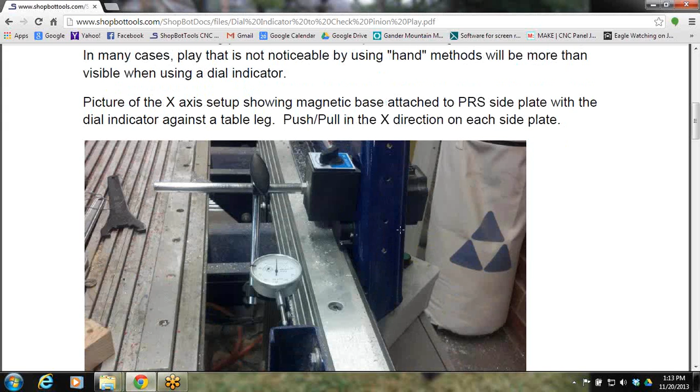Right here's a side plate, this is the end of a gantry machine, and you can grab that with your hand with the machine powered up, not turned on as far as the spindle turning, but the machine's got power to it. Grab right here with your hand and pull back and forth, and you'll eventually get to a point where that's got a lot of play in it. If you can move that thing back and forth a 1/16 of an inch, something's not right, something's not set on there. You don't need a dial indicator to show you that something's wrong.

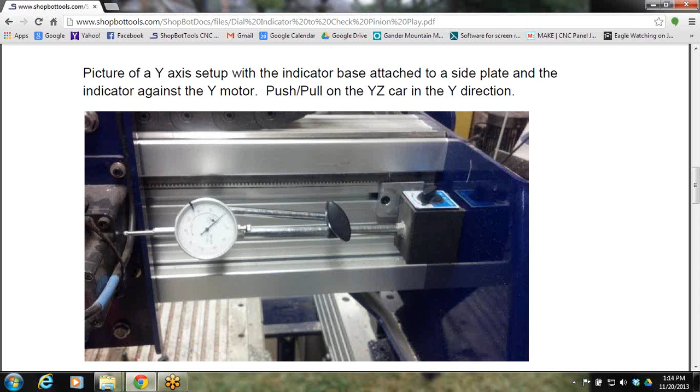But this is a way to, once you get it dialed in, use a dial indicator to move it back and forth and see what you have for tolerance here.

These are just some of the different ways of checking on that. But what I wanted to get into here is actually adjusting and putting in a new pinion gear. This is something when I had to do the first set of pinions, I printed this out, went out in the back, found the wrenches, and started replacing them.

What they're going to ask you here is if you call in, they're going to ask you what machine you have. Lately we have been referencing all the machines. In your folders, you would have the pack slip that we sent out with your machine, and right on it we have how many teeth are on the pinion and the part number, so we would know.

Just to reference too, your X and Y motors have a 30 tooth, where your Z axis has a 25 tooth. On a lot of the newer machines, they don't all have the same size. There's different ratios for different gear reduction motors. So that's one way to find out, if you have a newer machine, where to find what teeth you need.

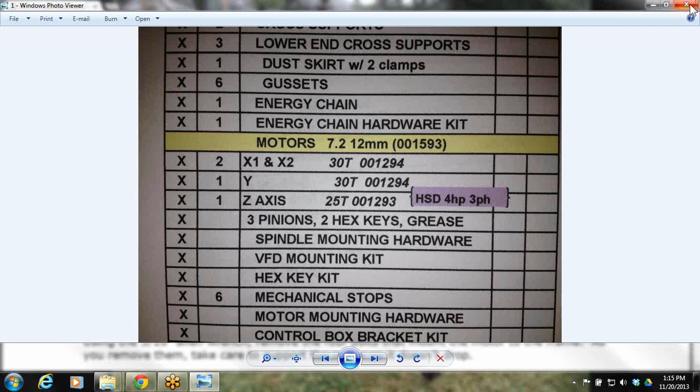But really the easiest thing to do is to actually count the number of teeth on the machine. These are all things to have on hand before you call in and order a new set of pinions. Depending on your machine, a pinion set could be between $40 to $60, and we're going to go over a maintenance doc here in a sec that will show you how long these will last.

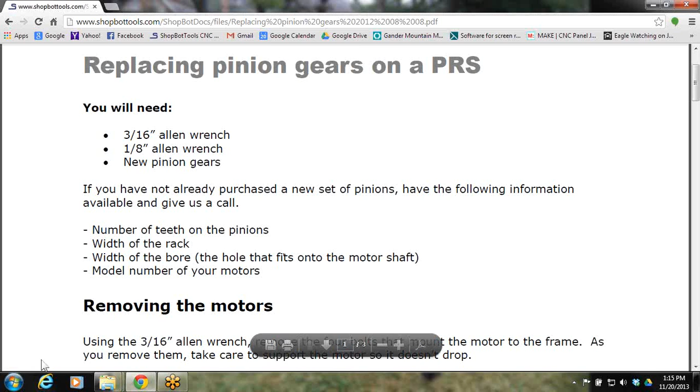What this first video we're going to get into doing is we're actually going to take and remove the motor, change the pinion, and put a new one on.

As far as machine maintenance, this would go to all machines. This file will be on the machine doc as well, but I've modified it a little simpler just to have it on one sheet to have it next to your machine. So we'll post this on there as well. This is really a daily checklist right here.

Warm up your spindle. If you have a spindle, you can do a C5, and that's just a shortcut for warming up your spindle. What you want to do is run your spindle C5, spindle warm-up routine, and that would warm up your spindle and let it run without a load being applied to it.

You're not actually cutting. Your spindle's just up in the air above the table, spinning around, letting the bearings and oil inside the spindle lubricate and get ready before you start cutting with it. Physically check the bit and collet nut for wear and debris. As you get into overconfidence mode, especially on a shared machine, you might think that looks like a 3/8 bit in there, but upon further inspection you'd find out that bit might have had some carbide chipped out of it, or it might have been a metric bit, and when you make your cut and have a problem, it might be something as simple as just that.

You're always going to want to home your machine. You never know who used it last, especially on a shared machine, either in a school or a shop.

Zero the Z-axis, and you have to make sure you zero it to however you zeroed it in your drawing file. If you zeroed it to the machine bed in your drawing, you better make sure you do it to the machine surface when you get out to your tool. And then finally, just do a proper operation check of router, spindle, vacuum, and dust collector. Make sure everything's running before you go.

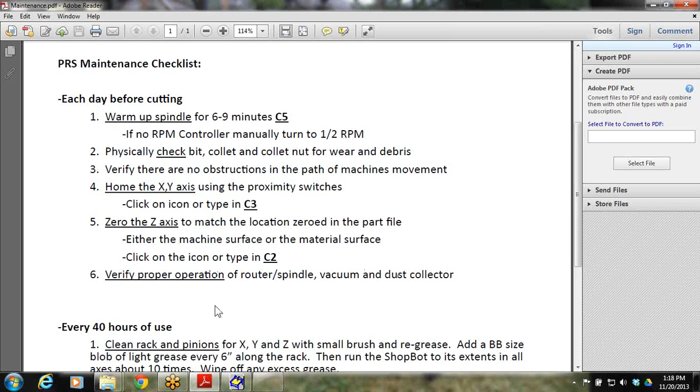It's good inspection. This is where we're going to get into the maintenance videos of today. One thing I see I don't have on here that should be is, first things first, you want to make sure that fan above your spindle is working. If you don't hear the fan going, it's not blowing air on that spindle, and that spindle could get too warm. So always make sure that fan's on.

Clean rack and pinions with a small brush and re-grease. We'll be going over this. Clean the Utilitrack, that's what's on your YZ car, that's what your spindle's hooked to, or your router's hooked to, and it goes up and down. Scrub all hardened V-rails, and just check your rack and pinions.

And right here is the bottom one, really the one you see in the slide. Collets and pinions are good for 400 to 500 hours maximum if they're kept clean and have not been crashed. We'll show you in a little bit what happens to some collets that have been crashed, and how if you crash it hard enough, you're not going to get your 400 to 500 hours out of these. So there's just your general maintenance doc.

And there's a lot of different size pinions here. We stock probably 10 or 12 different sizes of pinions, because there's been so many different ShopBots over the years. So make sure you identify those before you call in.

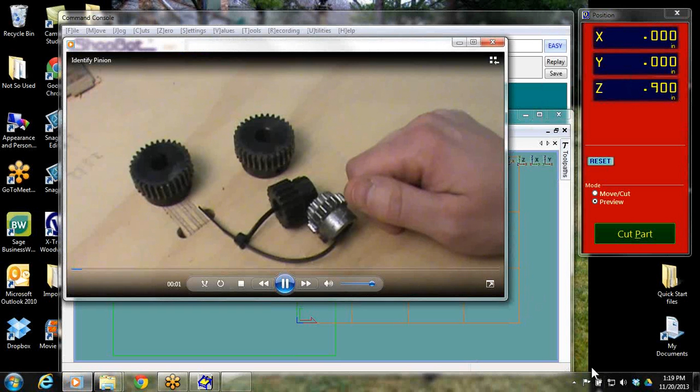All right, so, and again, the desktop people will be through the pinions here in just a few more minutes, and we'll get into general maintenance. So here we can see a brand new pinion, a really worn out pinion, and some pinions here that have needed to be replaced.

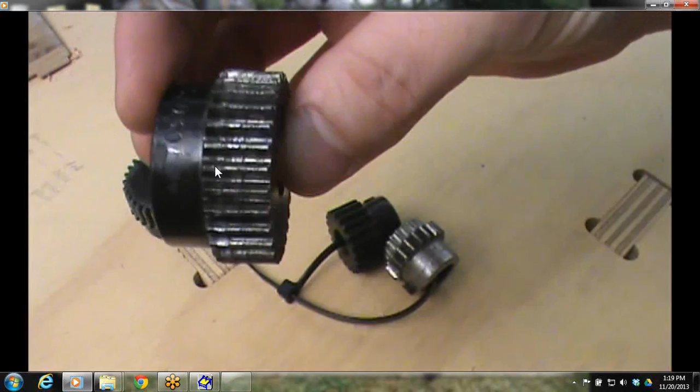So this was something I went and did a production support, where we go and do maintenance on people's machines for them. And this was one that I found these set of pinions on their tool. If you can notice by the video here, it's pretty much worn down most of the way except for this back 1/16 of an inch. So that was showing me that this pinion was not properly lined up with the rack.

And this is something that you do when you put your machine together, is you line that up. So there's a good pinion. And then there's a pinion that I don't know how that ShopBot was still cutting anything accurately. That thing is just gone.

So I'm hoping that you will have found an issue back here on these bigger ones that are on the table still before you get to that level. So you'll have a pinion on each of your motors. Generally your X and your Y's are the same size and your Z is different. So inspect how many teeth that you have.

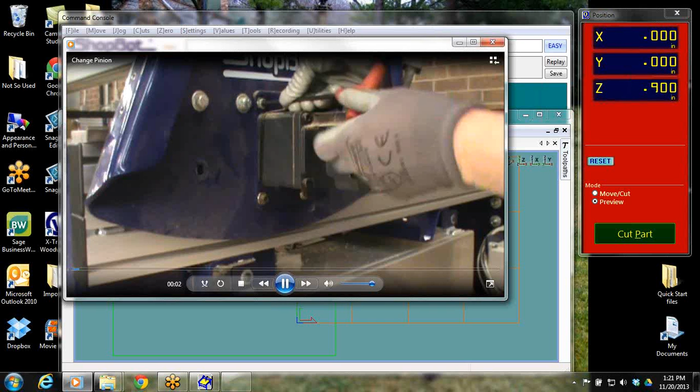So again, this is just one thing with a rack and pinion type tool that can go bad. So this would be your buddies and your gantry styled machines. All right, so how do we change these pinions? There's no crazy magical way of doing this. It's pretty simple. A couple hex key wrenches, loosen some bolts, and we've got ourselves a new set of pinions.

So on a gantry style, you've got pinions on both sides of your gantry. On a buddy, you've only got one underneath for your X. So you got 4 motors on a full-size machine, and you got 3 motors on a buddy.

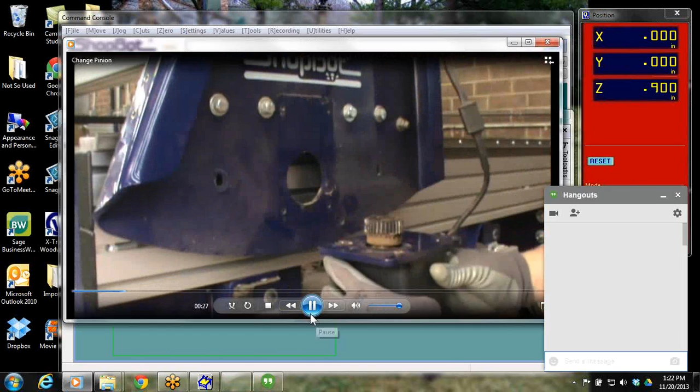So notice how this thing's got this motor plate, and we're not removing the actual blue plate here. We're not actually moving the blue plate. What we're doing is just removing the motor plate from the machine. So don't take the bolts out of the motor, take them off the blue motor plate.

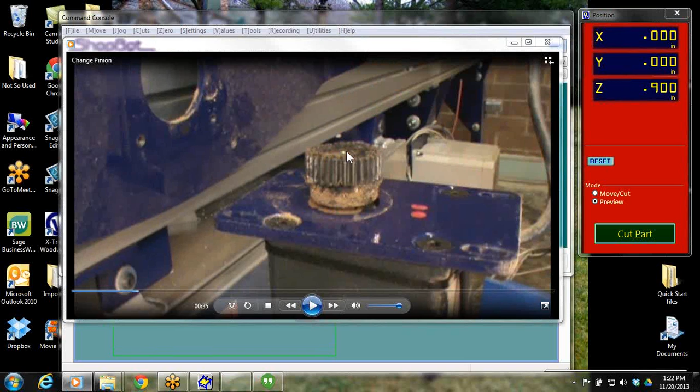So this is a pinion that has been used on our production machine that's full of sawdust and just beat up. What I was doing with my finger there was saying, hey, pay attention to how the relationship to the top of the pinion and the top of the motor shaft is, because when we go and put a new pinion on, we got to try to realign it the same height. You got a lot of play on the shaft of this motor, so you want to try to eyeball where that is and eyeball it back on for our initial startup.

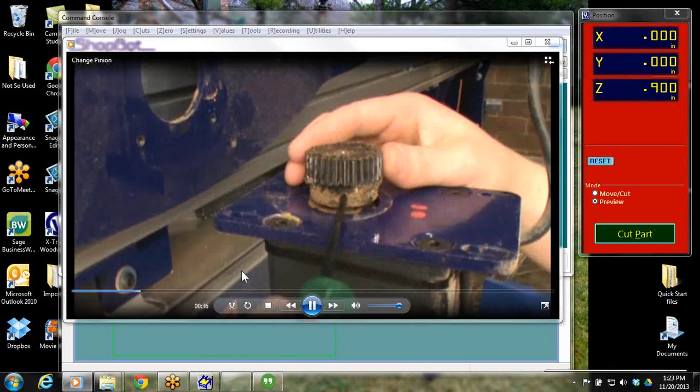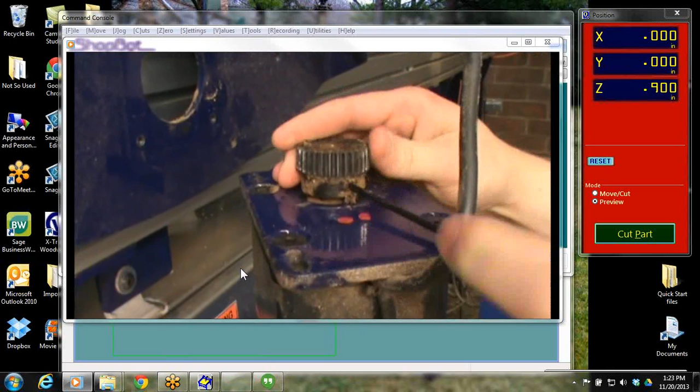So these will have 2 set screws in them. To loosen those up, you might want to blow this thing off or wipe it down first before you try to stick the hex wrench in there. But you just have to keep backing them off, and eventually it'll come loose. That pinion will come loose off the motor shaft.

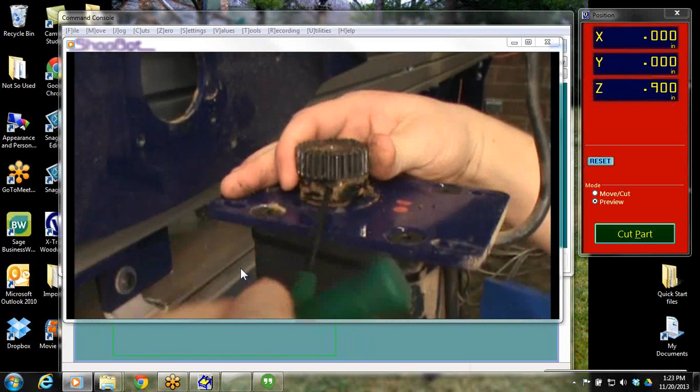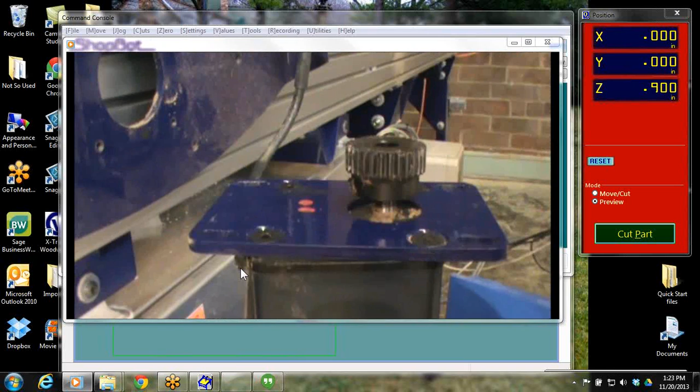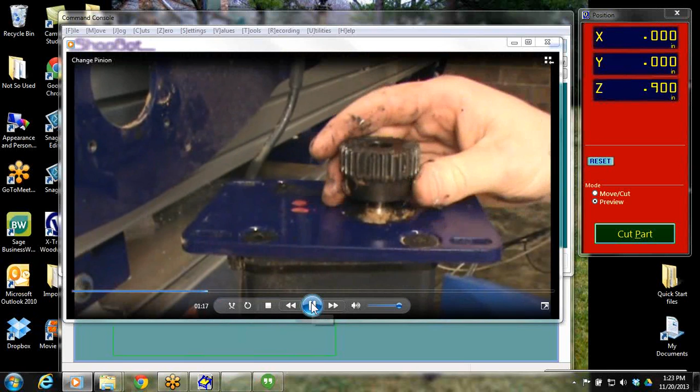Unfortunately, sometimes it gets stuck on there. So right there is me trying to pull it off, and it's just stuck on with that keyway in there. So what you can do here is, I say this very lightly, take a flathead screwdriver and try to pop a little on each side. Don't force it, because what you'll do when you force it is you could end up bending that shaft.

What I do recommend is you go and get one of these right here. It's a gear puller. You can get these at any auto parts store, and you center this, center the puller into the center of the motor shaft, and these 2 hooks, they'll come down underneath the pinion, and as you twist the knob up here, it'll pull that off perfectly straight up.

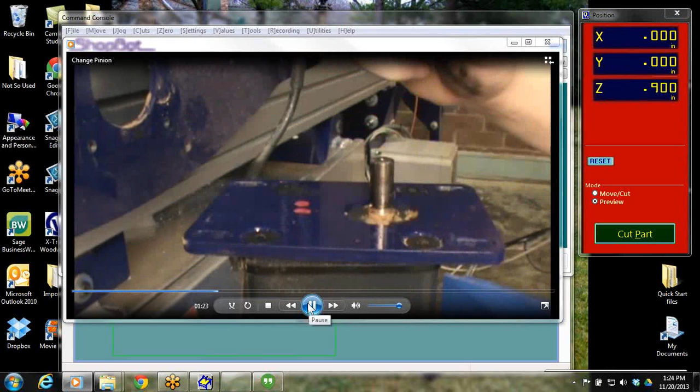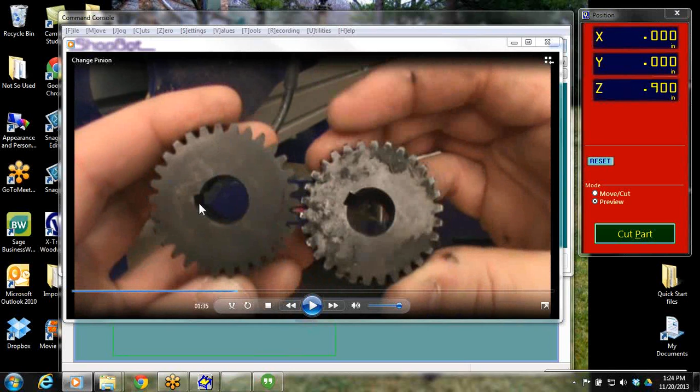So obviously I didn't need it in that part because I already had it loose. But here we go, visually inspecting this, seeing that the teeth have been worn down, and I'm comparing it to the new one. I'm verifying that it's same number of teeth, same diameter, same size collar, shaft size.

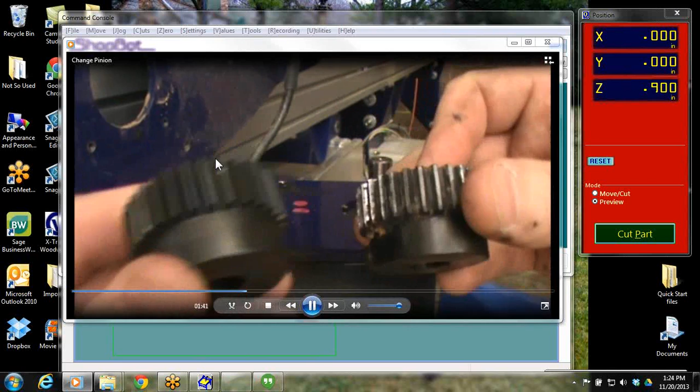Once you're happy with that, go ahead and put this back on. Line up the keyway with the flat shaft of the motor. It's not going to go down easily since it's already been a used keyway, but I'm lining it up close to how I had it before.

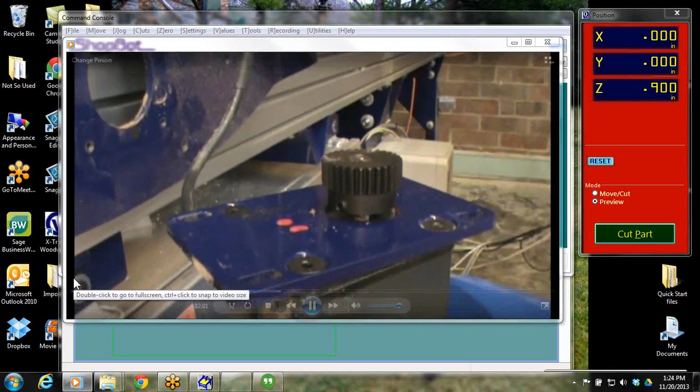I'm just eyeballing it, and I've got my set screw over that keyway. So here's looking at the end of the table, I've removed the stop block so we can see. This is the gantry up above, and here's the table going back to 96. What I'm going to do is visually stick this motor in there and see where it lines up with the rack.

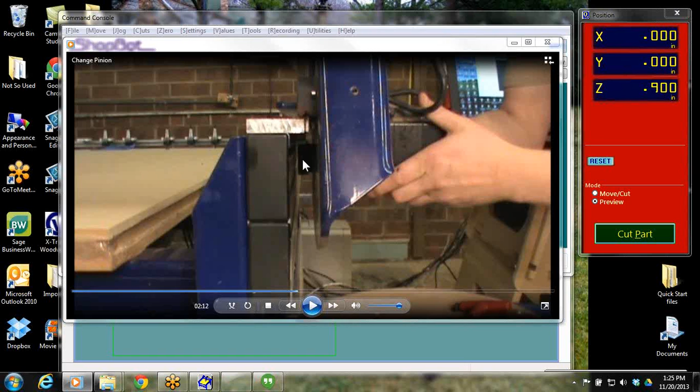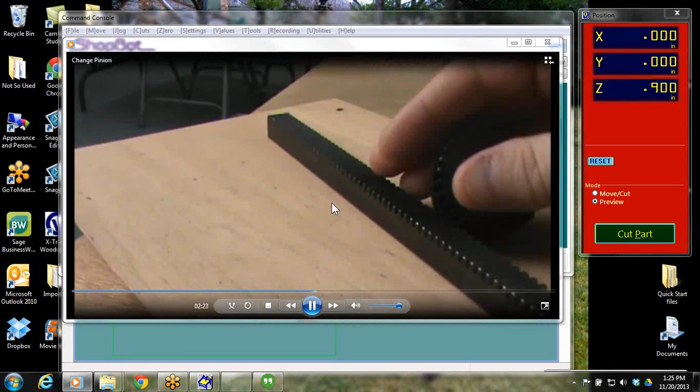So right here, this black part is the rack, and this is the pinion we just slid in. Those two need to be lined up with each other to run smoothly. I'm looking in there asking, is it lined up? To show you more specifically what we're looking for, I've mocked this up with a rack and a pinion. A pinion is a lot softer material than the rack.

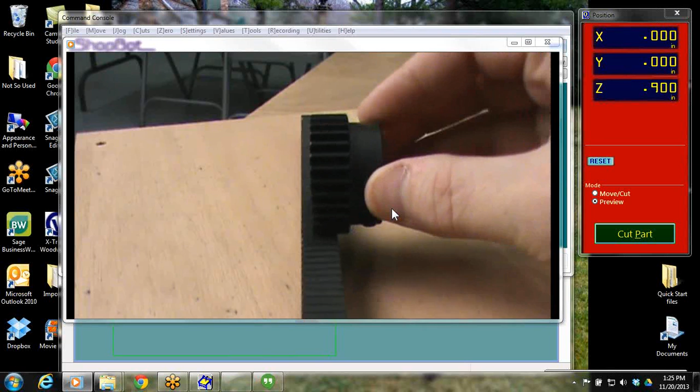If you're only cutting in one spot of the tool most of the time, you'll wear down that rack, and then you'll end up having to replace a 10-foot long rack, which is a lot of money and a pain to do. Where we wear down these softer pinions, it's a lot easier to change a pinion.

So what we're looking for is something like this, where that's flush. I've got the 1/2-inch rack and a 1/2-inch pinion, and they line up directly on top of each other.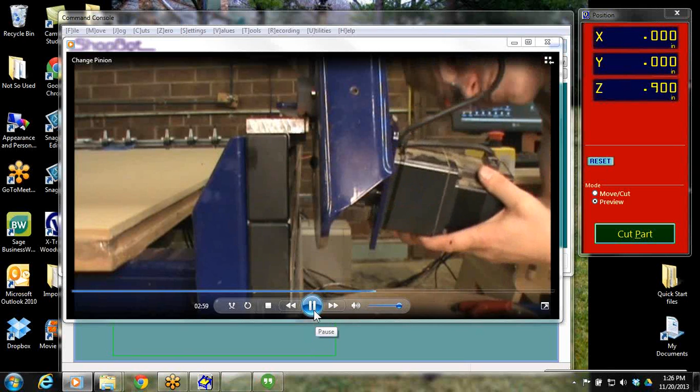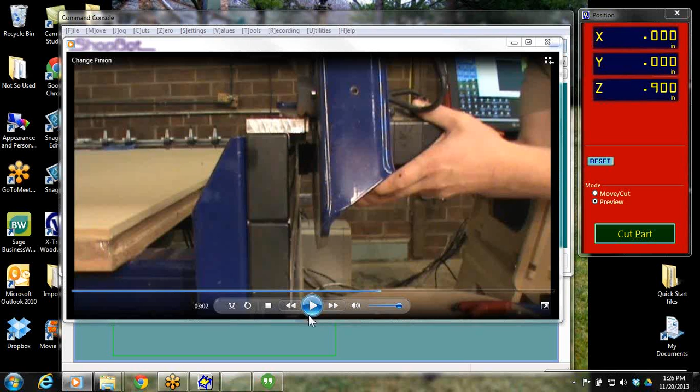So I would go back to the machine here, stick that back in there, and visually look from the end or from underneath, and what I can see is I've got a little bit of a gap here. What's going to happen is it's going to wear down the pinion, and it's not going to wear it down evenly—it's going to wear it down like that one we showed in the previous video.

So what I would then do is loosen the set screws up a little and pull the pinion up on the shaft a bit, which I've already done.

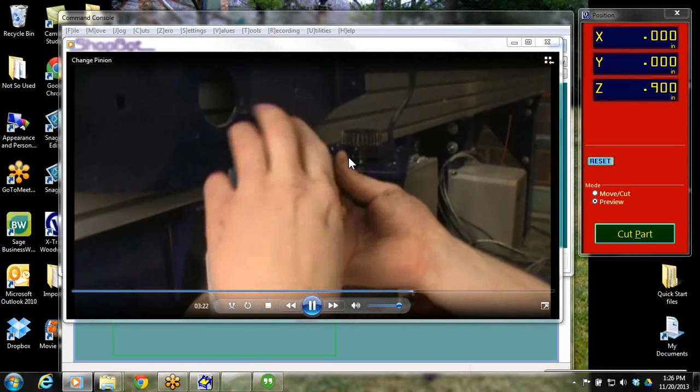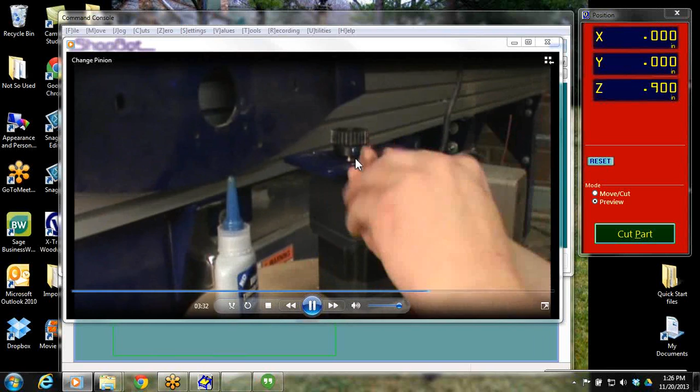But what you see me doing now is taking Loctite and putting it on the set screws, because if we don't put Loctite on there, those set screws could loosen up and then the pinion could have some play in it. Sometimes you might just want to check these because your machine's got a little bit of play in it—it could be that your set screws have loosened up over time, or the Loctite has failed.

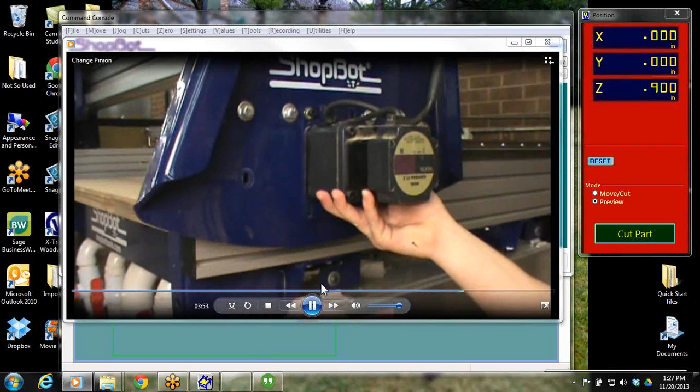At that point, you've got this on. Wipe it down. We've lined it up as far as length on the shaft, and now I've just held it up—I haven't moved the gantry or anything, so it goes right back up into the rack. I'm just hand tightening these bolts right now so the motor can rest in the slotted holes.

A T-handle screwdriver works real nice for this because you can get in there and get some torque on it with your hand, and it goes a little quicker.

So I'm just going to take that and push it up with my hand and hold it, and I'm just going to kind of kiss the bolts to the motor plate—I'm not tightening them, just getting it snug. Then I'm really going to get underneath it here and put some force on it and tighten those down, get those good and tight.

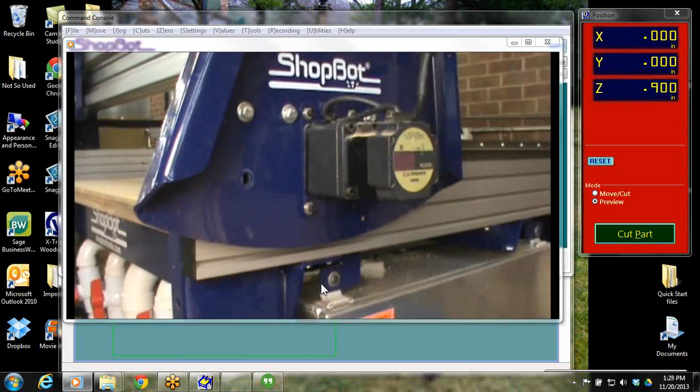And that's how you change it, line it up, and put it back on. Your final check here is to grab that gantry end plate and see—I don't see any play on there, so that means I've gotten that tightened back up.

What you will feel is a little bit of a tick, because there is a little bit of backlash in these type of motors. But if you're moving back and forth 1/16 of an inch or greater, you better go back in there and tighten something—something's loose. But if you're just feeling a little click click back and forth, that's just a little bit of play that is in the motor. That part is normal.

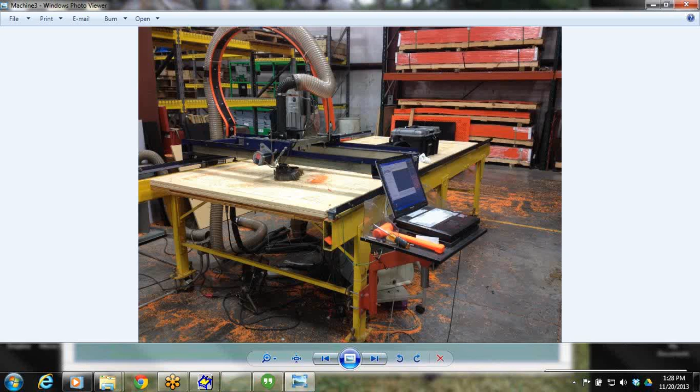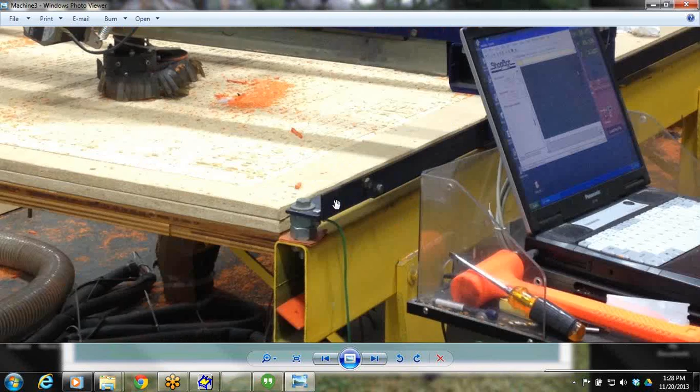Another one to show you here is a PRT motor. This one is done a little bit differently. Here's an old ShopBot - back in the day they didn't even have tables that were sent out. You pretty much just bought the rails up. The rails back then were a piece of angle iron that had a grinder that would grind a point to these, and that's what the machine ran on. So this is one that was a production support where these guys are a production shop.

They actually have 3 ShopBots, and while the other 2 are running, we turned this one off and went ahead and recalibrated it. But for these, the motors are a little bit different.

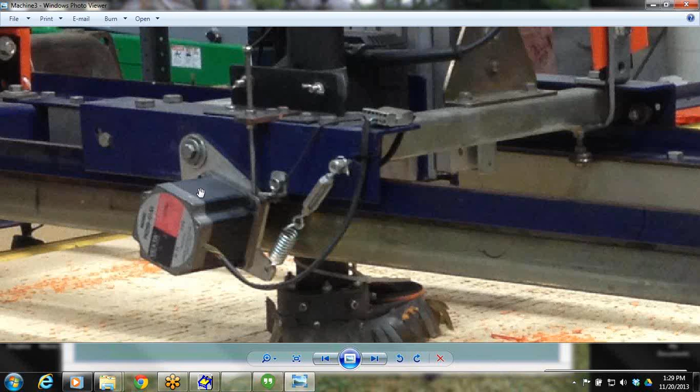On these you actually have a spring that is torsioned down here. So you would just untwist this. It's going to let a little bit of play off the spring, and then what we'll do with that is just take this hook, and it comes off the bolt - this is just on a pivot right here. This thing will just pivot back and forth. So then you'd put a wrench on this and put a wrench on the nut that's on the back side, and that's how you would take it off.

So all these machines are going to have multiple motors. On a PRS or PRT gantry machine, you've got an X motor on each side, you've got a Y motor that runs the gantry back and forth, and you have a Z motor that goes up and down. If you have a buddy, you've only got 3 motors - you have 1 in the X versus 2 on a gantry, where you've got to have power on each side.

So whether it's a gantry tool, whether it's a PRS or a PRT machine, it's pretty much the same concepts for aligning those racks. You want to align them - you don't want to get it in too far where it's scuffing, and you don't want to have it out too far where it's not running parallel.

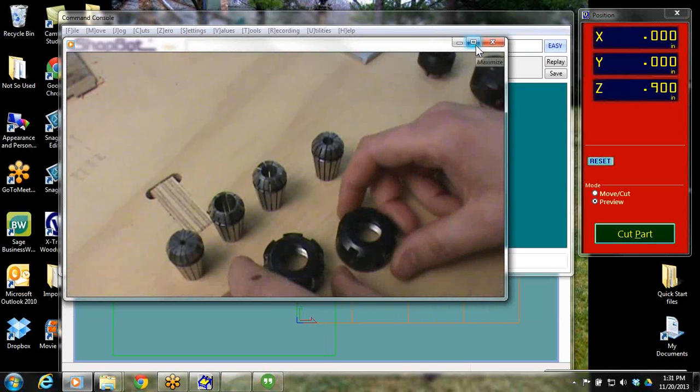So that's pinions. Now let's get into stuff that pertains to all ShopBots, even desktops - collets and collet nuts. There are several different sizes between a desktop, a full-size machine, and even an automatic tool changer. You have different sizes of these collets. Not only do you have different sizes, you have them so they take different bits - here's an 1/8 inch, a 1/2 inch, a 3/8, and a 1/4 inch. There's different size ones for routers as well.

These are a 2-piece spring collet, and they need to be unsprung and all the air blown out of them, all the sawdust blown out, and then have them clipped back together. Your collet nut here that I'm holding and looking inside, I'm feeling for if there's any ridges left. You're visually inspecting to see if there's any cracks or anything in it. If you start having stuff like that, it's a bad collet nut. Collet nuts don't often go bad.

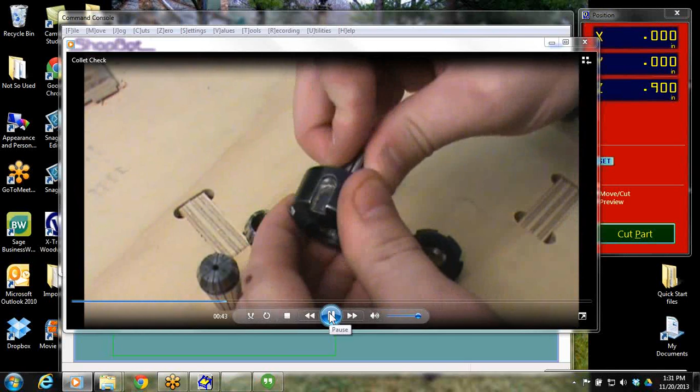They're good for a couple thousand hours, but your spring collet will - you're going to lose some spring in there. So some people will start having problems where their bits start cutting and then it slips out a little ways and starts cutting deeper because the spring is gone. Here's one here - look at how burnt and used up this is in the middle. We can actually visually see that has been way too hot, and look how easy that falls out of there. That should fit in there, and you should not be able to shake that out. If that thing's falling out, your spring in that collet is no longer any good. So that's one to throw away.

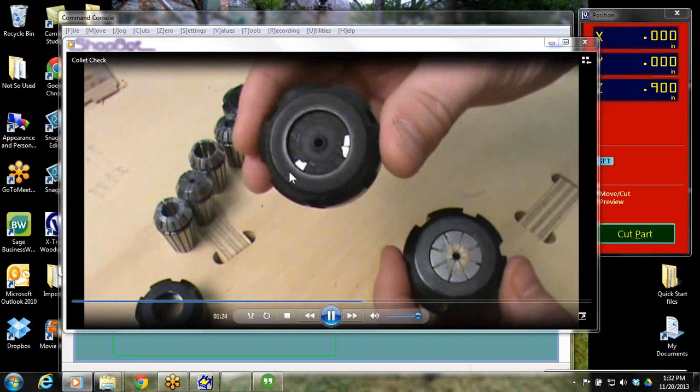Collets are around $30 to $70, depending on how big a machine. These are ones that were run down into the machine too deep - I can't even spring those apart. So what happened was that was zeroed in wrong, and it actually dug down into the material, started spinning, and it sucked the material up into the spring, and now it has wrecked that. So there's a collet and collet nut that need to be thrown out.

If you're breaking those apart with a hammer to try to save your collet nut, you need to just throw that collet nut out. Now look at this one - you got a nice shiny one, and then you got this oxidized one.

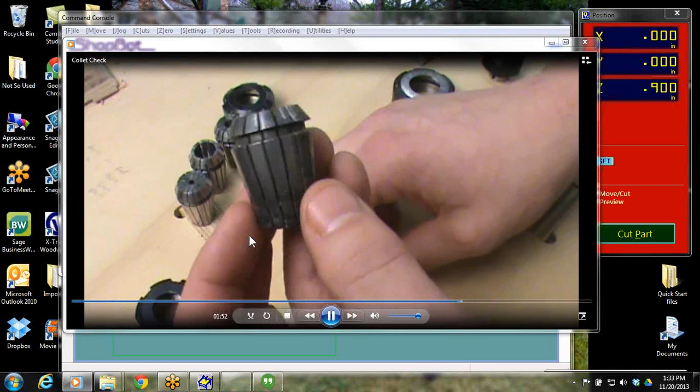This one here sits on the training table, and one of the people in one of the basic training classes accidentally knocked over their Coca-Cola that they were drinking, and it spilled onto this collet. We shook it off but didn't really clean it, and it was like that by the end of the day. It already started oxidizing, and it's gotten a little worse now over time. But something like that too, it's down inside those precision slots.

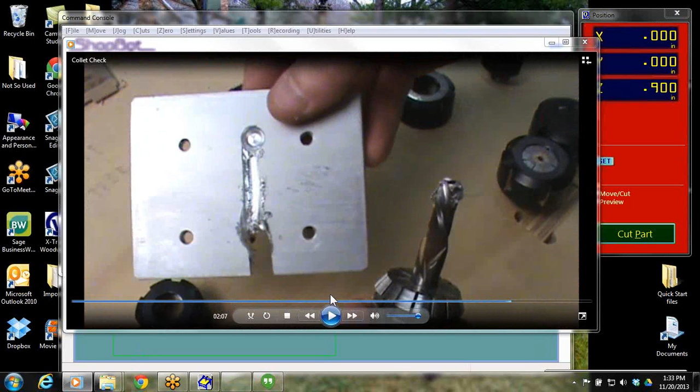That's no good either. I'd throw that one right in the garbage. And finally, what is this happening here? Looks like we had a bad crash. So there are times where we have these little oopsies, and this here was dug into this aluminum. This was on an alpha machine. It started cutting through, then lost the Z position, finally stalled out here and stopped. So it wrecked the bit. And if you have a hard crash like this, and I'm talking, this thing hit hard and stalled the machine out, more than likely you've wrecked your collet as well.

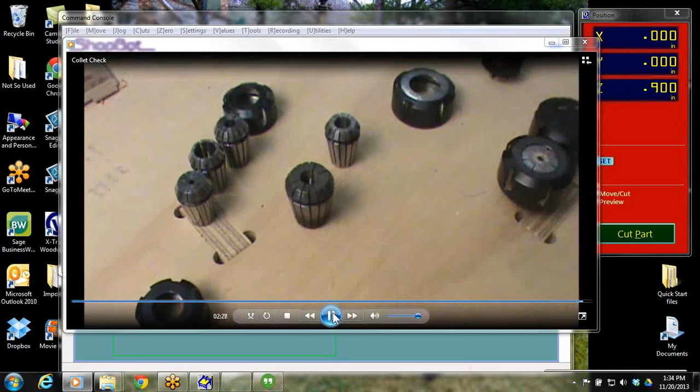Visually inspect the collet nut. That doesn't necessarily always break, but I can't see any physical things wrong with this. But just going and sliding that shaft back in there, it's so loose. It's really just very, very loose. I know that I've kind of dinked up those springs in there from crashing that into the aluminum. So if you have a bad crash like that, throw it away.

So keep them things clean. Keep them blown out. And before you put them into your spindle, make sure you spring the collet and the collet nut together, and then stick it up into the spindle and start threading it. Those aren't designed to be put in there as individual pieces. All right, so there's your collet and collet nut.

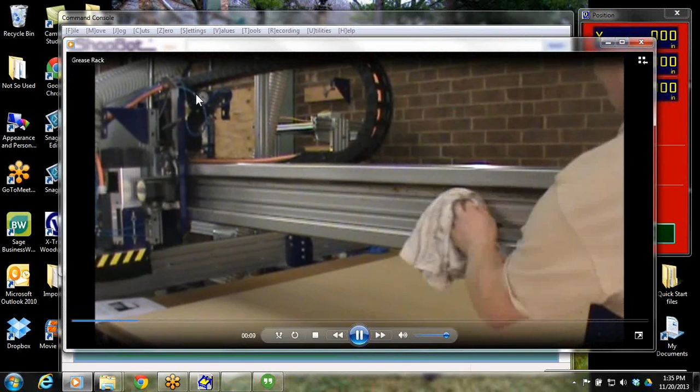Next is greasing the rack. Now let's get creative here and let the machine do some of the work for us. So this is what most of our machines probably look like right now, which, you know, it happens. You're in a shop, you're cutting, you don't have time for this kind of stuff, but any of this maintenance stuff that you can do will help prolong the life of your machine. So I'm going to wipe this thing down with a rag and just wipe off all the excess. Sometimes we even get a little brush out and brush out what's inside the gears.

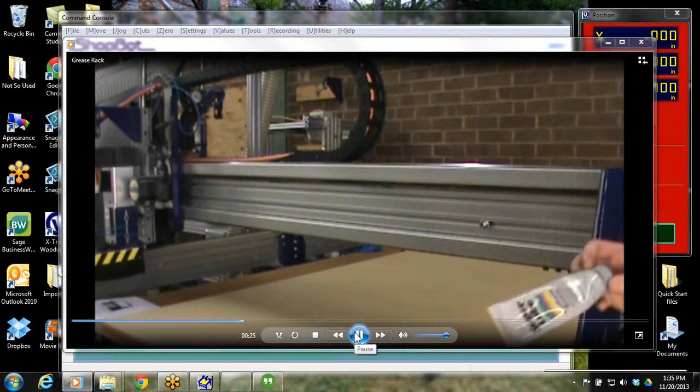But a rack and a pinion is designed to have grease in there. Those little racks and pinions, they're designed to actually have grease inside there at all times. You want to be really lubed up on this. So this is what we use here. It's called Super Lube, a synthetic grease. And this stuff's really nice because it's clear. That way you don't have a black line across your belly every time you lean across your machine.

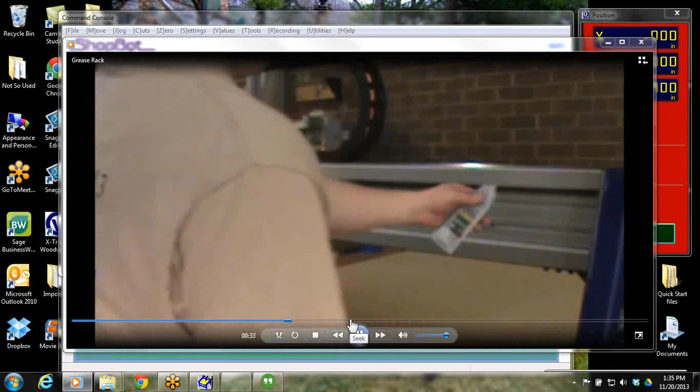So take this stuff and squeeze it on about 6 inches down your rack. And I'm squeezing a lot on - I'd rather have more on there than less. I'd rather wipe off a little excess. I want this thing greased up and running smooth.

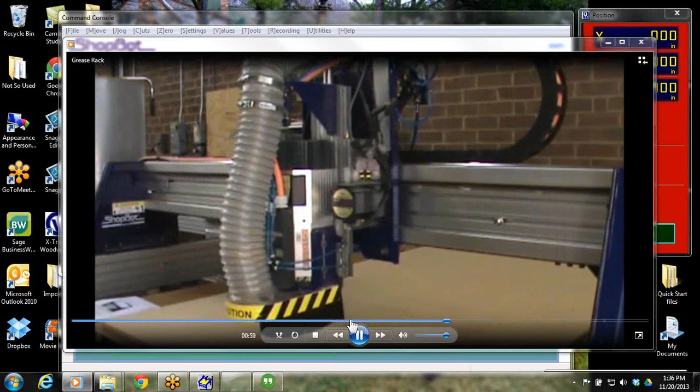So once you've got it on there, just bring up your keypad and use your arrow keys and just move it back and forth and let it grease itself. There's no sense of you sitting there running it all the way back and forth. Do this 8 or 10 times and it will just roll the grease on. You can see where there's some extra already kind of blobbing out, but I'll just wipe that off. So keep this thing up greased good.

I try to do mine once a month or like every 40 hours of use. That's what I do at home. Here at the shop, we're doing this probably about once a week. So just wipe off any extra. It helps keep sawdust and gunk from sticking to it.

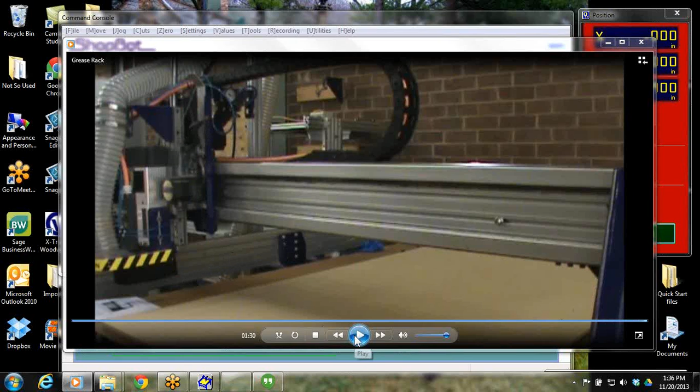And then again, do this on your X motors and your Y and your Z. So you're going to do this on the rack on both sides of your gantry, and then there's a short rack right inside here, and you'll actually put some grease. You might need to get a scrap dowel or something, or a scrap piece of wood that you can put some grease on the end of it and stick it down in there. So keep things greased up.

Another thing that's on the machines is there's a little grease fitting on the ends of the gantries for the desktops, and that's where you can squeeze a little grease into those. If you look on your actual machine down in the bottom of the gantry, there's some little fittings there where you could put a grease gun on it and squeeze some grease into there.

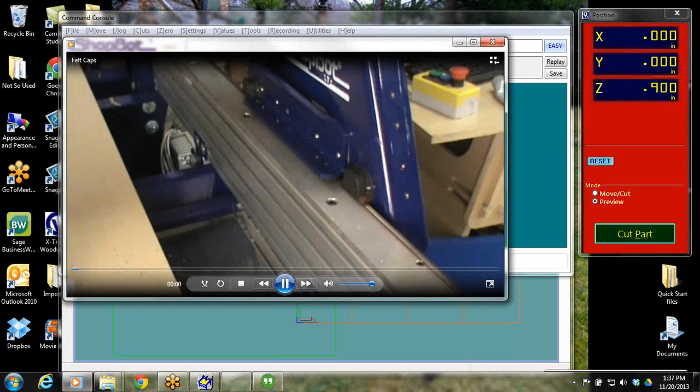Alright, so the next thing is felt caps. These are something that get overlooked by most people. This is on the inside of our gantry, right inside of the beam, and here's the work table back here. I'm taking these 2 little screws out because you've got 4 of these running along the gantry, and then another 4 of them going along the beam.

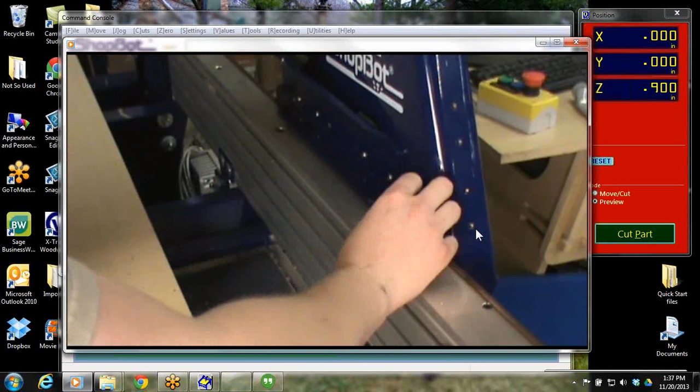So these are wiper caps number 2 and wiper caps number 3. More than likely the caps won't go bad, but what they'll do is I'll pull these off sometimes out in the field, and that whole thing will be completely full of sawdust.

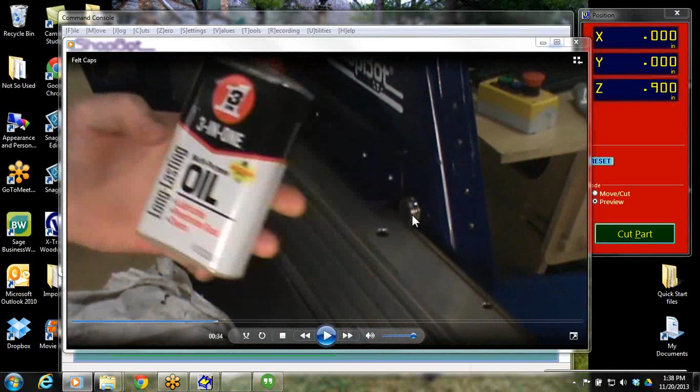So on a buddy, to get down and do either the X rack or the wheels on those, you'll actually just pull the power stick completely off your machine, flip it upside down, grease your rack, and then take this oil and do all the wheels. I think you have 8 number 3s underneath a buddy.

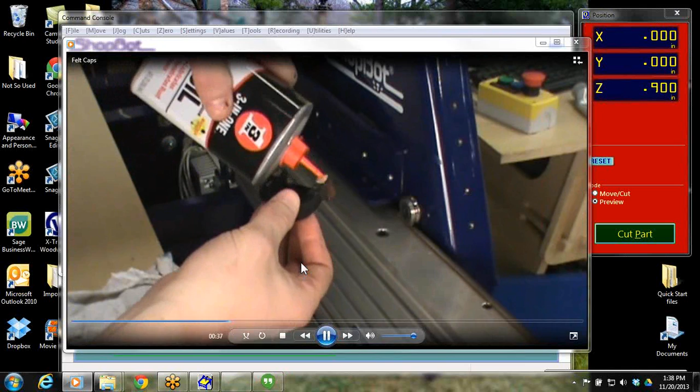So I'm just going to oil the felt again, have it cleaned off, and then put it back on. Notice this has a slotted hole too, I can go up and down with it. I like to have it right down tight next to that V-track, that way it doesn't get full of sawdust.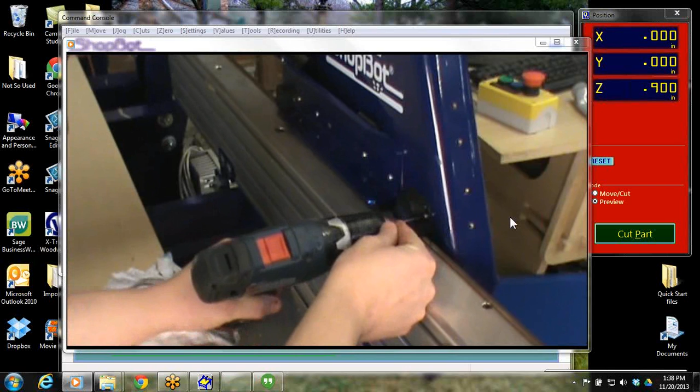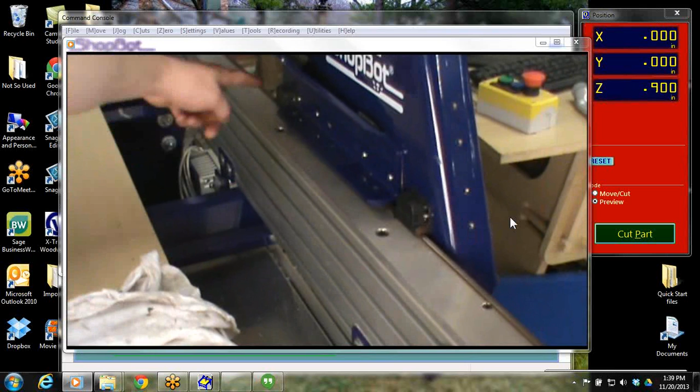So on your gantry machine, do this too, you'll have 8 of these between your beam and your end plates. On a buddy, you'll have your wheels underneath, and you'll also have your wheels on your Z. So there's these ones right here. And the next scene is going to show you some other ones.

But before you even think about these, those wheel number 2s that we just showed you, there's also these 4 number 3s. You got 2 of them back here on the top of your beam. And if you look underneath your beam, that's those eccentric wheels that if you installed your own gantry, you had to tighten those up to the beam. Same thing on the buddy.

On the back of this YZ car, this is the plate that has your spindle or your router mounted. On the back side of it, you'll find 4 big black caps, and it's just like what I showed you in that video. Pull those off too, those usually don't get as bad. And on the buddies underneath the table, it usually doesn't get as bad, but we'll all have this on buddies and full-size tools.

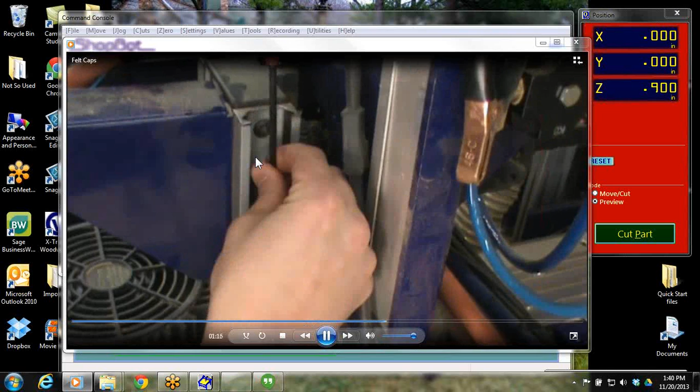It's right here on your YZ car, this is that Utilitrack, and that actually has 4 felt inserts that are protecting that. So I loosen these up, and just like before, you'll use some 3-in-1 oil. Wipe them out, and if it's real dusty, blow that out with the air hose.

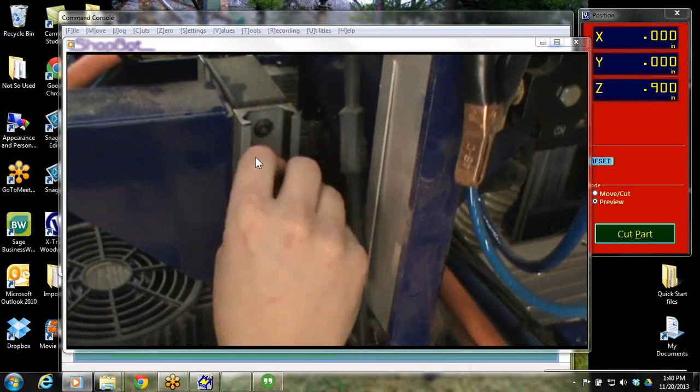And this one's not too bad, I'm just going to kind of wipe it off, wipe the stuff off there. You can actually pull that felt out of there and wash it if it's really bad, and then just re-lube it up, stick it back in there, tighten it down. You've got 4 of these that you got to do, 1 on each top and 1 on the bottom, and that keeps the dust out of the wheels for your YZ car going up and down out of that Utilitrack.

So then I would take and use the page up and page down a few times. That'll do your rack, and it'll do these felt inserts.

And if I was just doing this on my machine, not talking, this whole process would take about 30 minutes to really go through and dial it in to how I'd want it. So, surface top.

We're going to see in this next video how a top eventually will either warp because of temperature and climate changes, or we've cut down into it so much that it's no longer flat. So yes, you could go into your PartWorks or your VCarve Pro and draw a rectangle and surface it, or what we have right here from the regular ShopBot 3 software is if I go to Tools, I can come down here to Table Surfacer, and it brings up the Table Surfacer, and you could go in here and read about it to get a little bit more in depth on how it works and what it is.

What it really is, I set it to the size of my machine, which I'm going to demo on a desktop. So 24 by 18. I got a 1 1/4 inch diameter bit. I want to surface negative 0.03 - you've got to make sure you have that negative in there. Bit overlap percentage of 15.

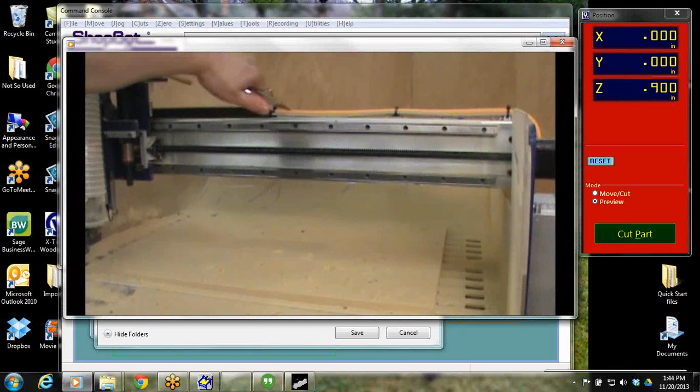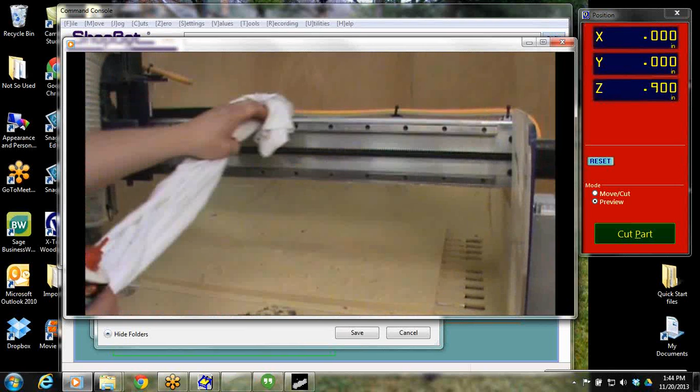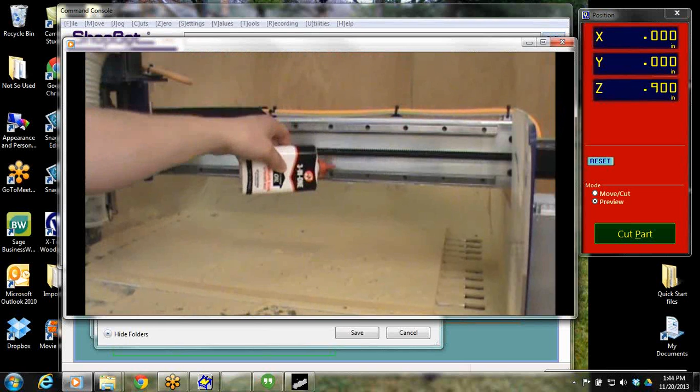I like to take an air compressor and blow the whole machine clean. I'd actually wheel this out into the shop and just blow the entire thing off. Then I'll take a rag and wipe it down, and then I'll take some 3-in-1 oil again, the same stuff you put on the felt tips, and put it in several different spots. You can run the machine around. I like on this stuff to actually take a rag and really rub it into the metal.

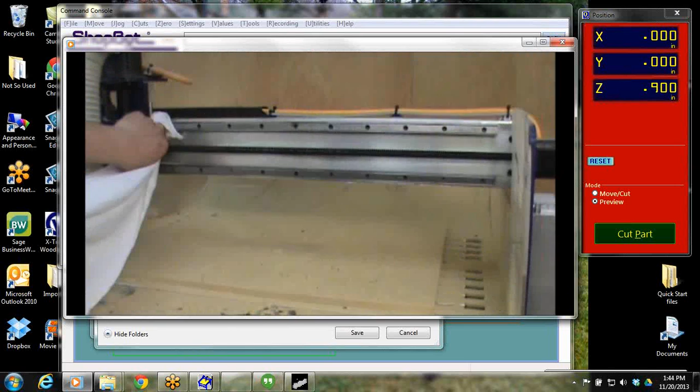On your gantry machines, you have a V - it's a big hardened V rail that goes up and down the X, goes up and down the Y. You've got them on the top of your gantry and the bottom of your gantry. Once you get done doing the first half, move it to the other side and make sure you do what you couldn't reach that was underneath the Y-Z car. So rub them down, oil them.

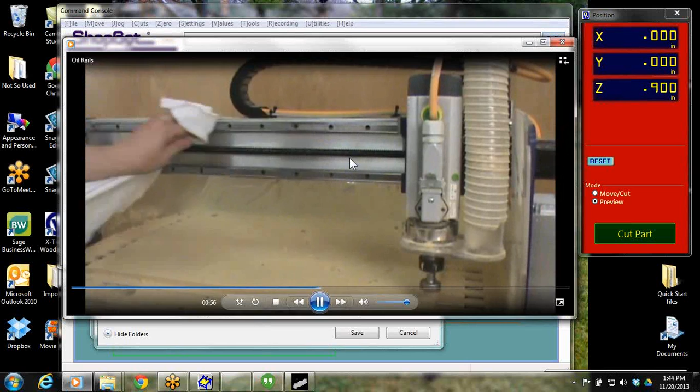On your desktop too, not only do you have your Y car here, but you've also got to go and do the ones along your X. You've got one on each side of your gantry, and on your big machine same thing - you've got V rail all the way around it. So keep them oiled up.

Here's a big machine here, same thing - I'm going to wipe it down, get that on there, and I like to rub it right into that hardened rail.

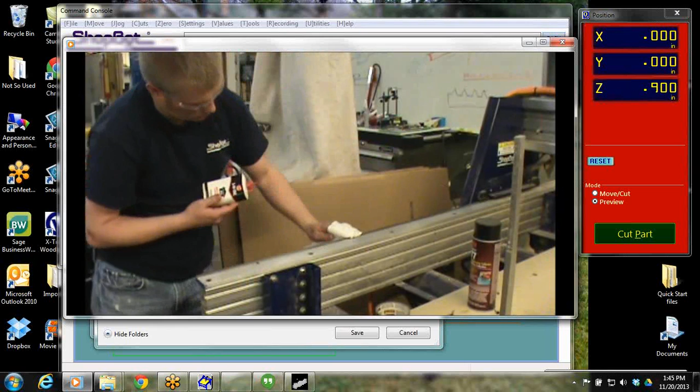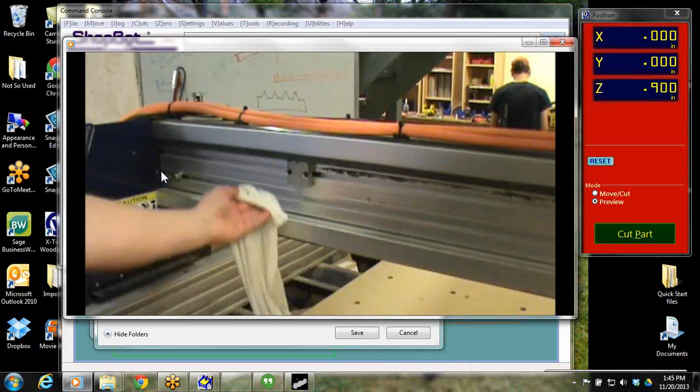What will happen too sometimes in some shops - in some shops where there's salt water present, salt in the air, it'll actually make these rusted, so you want to keep them nice and oiled. Sometimes you'll even want to have a little Scotch-Brite pad and rub that down and rub the little rust off it before you put the oil on it.

Okay, well that is my machine maintenance simplified and in a rundown. This video will be posted up soon, and right next to it will be this document, so you'll be able to see a little bit more of the machine maintenance.